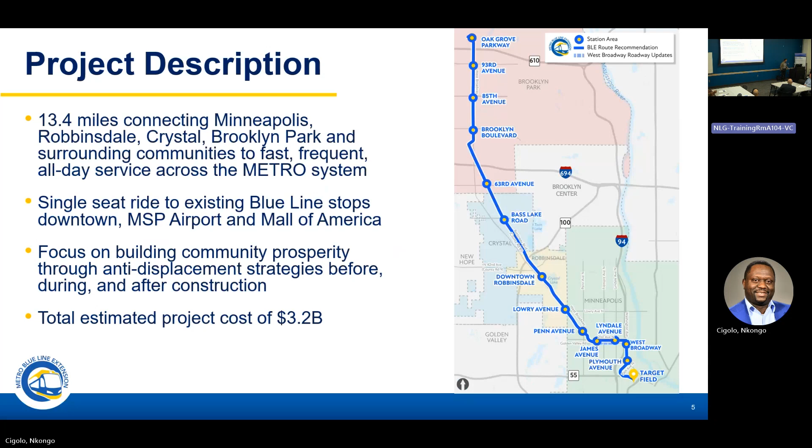And of course, with the extent of construction, in addition to bringing transit to communities, there's a huge focus on building community through community prosperity, through anti-displacement measures that make sure we maximize the value that this project provides to our customers and to the community.

In terms of project schedule, 2024 has been a very busy year. There's been a lot going on with both development of the preliminary design plans, as well as environmental work, and also a key milestone that we had to reach, which was municipal consent approval. So what I'd like to focus on is where we're at between these two points: summer '24 and final design. That's going to be our focus in '24-'25.

Environmental work is going to continue. We have to finalize our supplemental environmental impact statement. This is a federally funded project to some extent between Hennepin County and the FTA, and how this project is funded, it is important that we follow the federal guidelines and procedures, including the National Environmental Policy Act and the Environmental Impact Statement. As that's ongoing, we have already developed a 30% set of plans.

We have that to look at in person here as well. That's the set that went to the corridor cities for review and approval, and you'll see that shortly here as well.

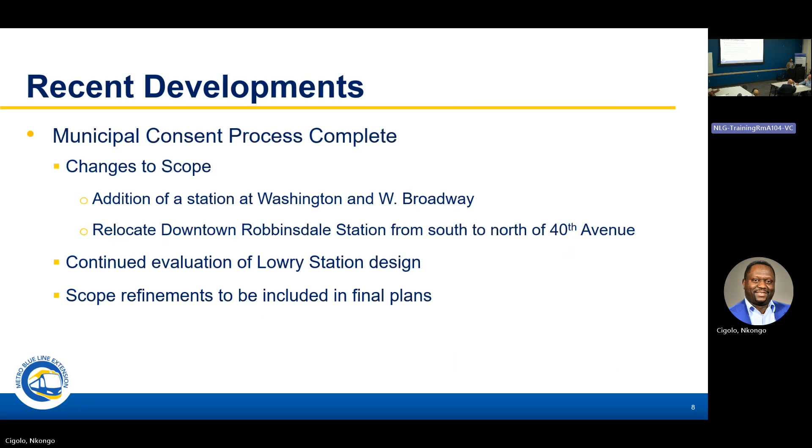There will also be a relocation of the Robbinsdale station at 40th Avenue from south to north of that intersection. That's not what's shown in our 30% design plans, where it's on the south side. There's also continued evaluation of the Lowry station and other scope refinements that we'll hear about shortly. With that, I'll hand it over to Nick.

Thanks, Shaheen, and thanks everybody for coming. I'm Nick Landwehr, Director of Engineering and Design for the Blue Line Project. I've been with the project since we opened the office in 2015. Prior to that, I was on the Green Line as an engineering manager for the Central Corridor project. I work for Metro Transit.

Can you hear me okay back here? I can hear the sound up here. Let's make sure we've got everything working back there.

So we're going to go through the alignment briefly. As Shaheen said, we'll have some roll plots out here, and if there are any questions about the alignment, I'm happy to answer whatever I can.

Just to recap, we're just shy of 13.5 miles of alignment. We started right over here at Target Field Station. This is an extension of the existing Blue Line, and we'll come off of Target Field Station, run through the North Loop area, cut across on a new bridge at 21st and through Minneapolis, and catch up with West Broadway.

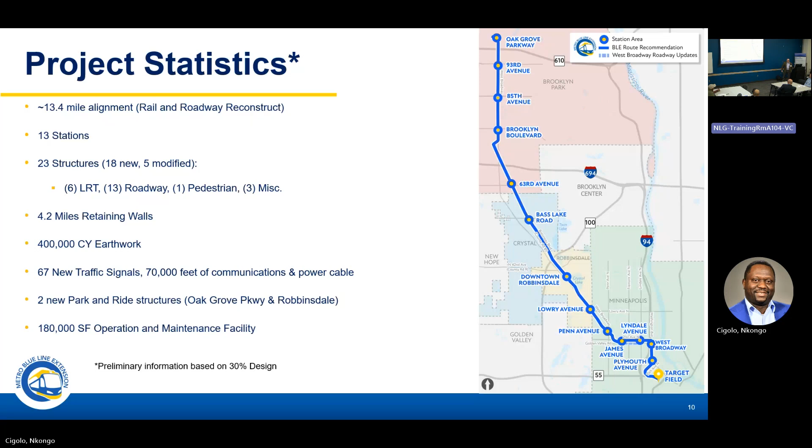Follow West Broadway up to about North Memorial Hospital at Lowry Avenue, where West Broadway changes into County Road 81. We'll continue on County Road 81 through Robbinsdale and Crystal, and when we get north of 694, the alignment shifts over onto West Broadway in Brooklyn Park, where we continue center running up to the northern terminus at Oak Grove Parkway, just north of 610.

We're at the north side now, working on some key elements. On the very north end of this project, north of 610, we'll have an operations and maintenance facility with facilities for roughly 32 vehicles. We'll have light maintenance in there, paint booths, wash bays, wheel truing machines, similar to our Franklin facility, and this will accommodate that line and its vehicles.

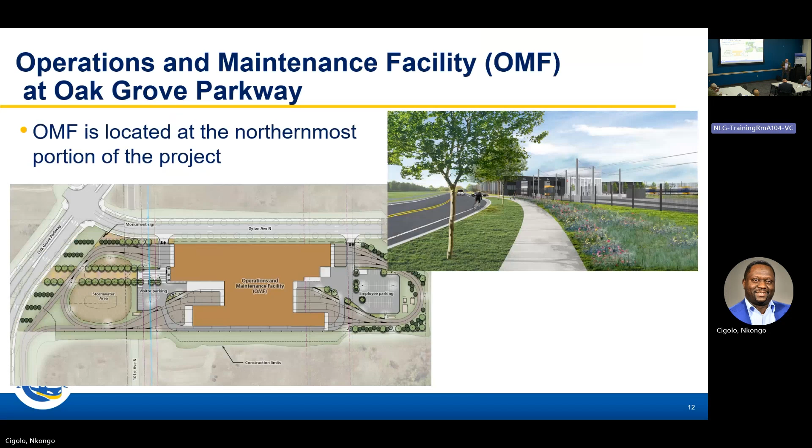Working our way down from the very north end, our first station is at Oak Grove Parkway. North of 610, for this project, it's pretty much a green field up there. Target Corporation has their northern campus, but otherwise it's pretty quiet in that area.

With this project, we'll be setting up the roadway network to accommodate our station and the maintenance facility. We'll work with the city to put backbone utilities in place and get that roadway framework established. We'll have a station here at Oak Grove Parkway, along with a park and ride for roughly 500 vehicles.

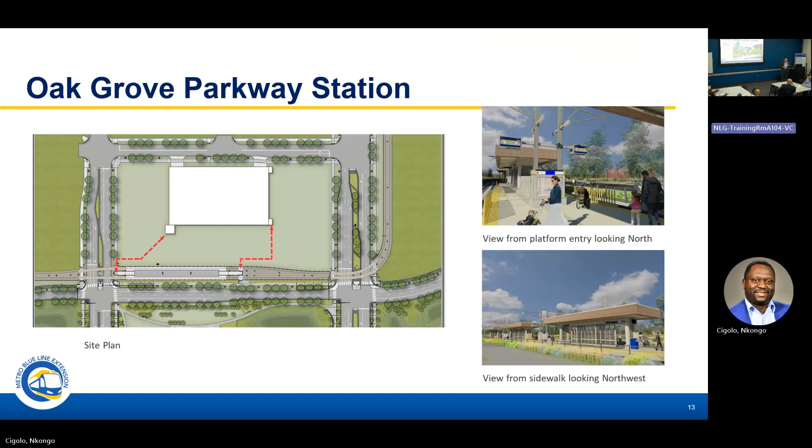Within this block, the city of Brooklyn Park is looking at development. I should note that most of our alignment will be at grade. We try to be center running within the roadway, and the stations, for the most part, would be center platform stations. We try to keep those consistent.

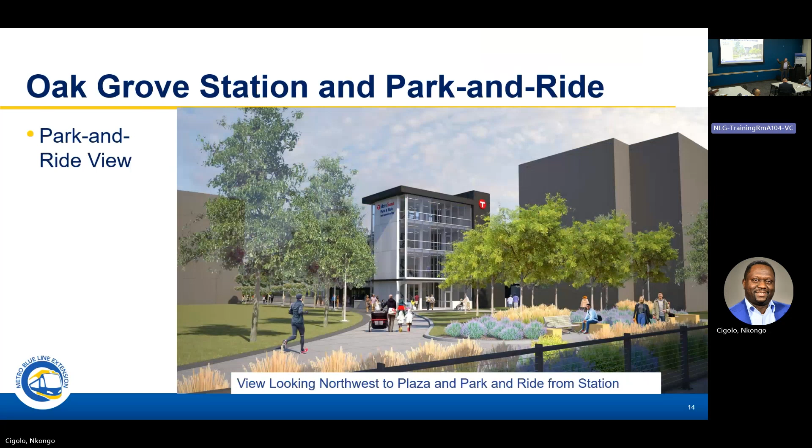So this would be the Oak Grove area, from the station looking at the park and ride, and the black indicates some potential future development.

Moving our way through Brooklyn Park, we have five stations there. This area at 85th is very typical of the stations in Brooklyn Park, at North Hennepin Community College. On the left-hand screen, you can see the station platform in the middle of the roadway with at-grade access for folks.

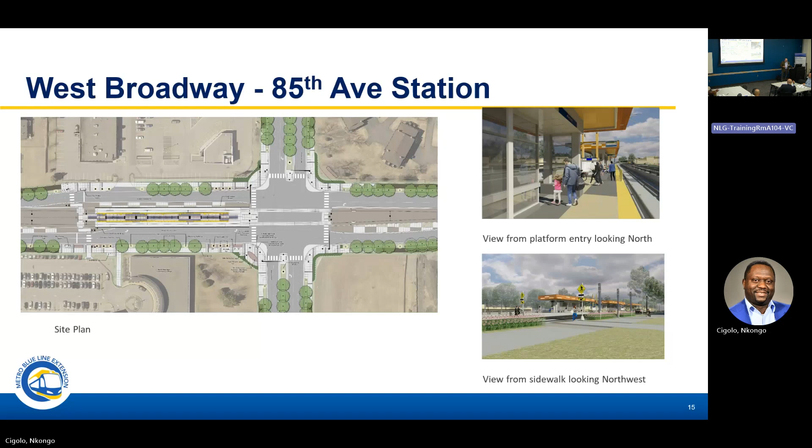All of the platform, the mechanical, the duct banks and such should be in about the same location for each station. We try to work with the community to differentiate them with maybe some of the color palette or how we handle roof facades. But we keep those very consistent for ease of customer use, ease of construction, and ease of our own maintenance.

As we come down West Broadway, about 90% of this alignment is in the county roadway, so Hennepin County is the local funding partner for the project. We're working closely with Hennepin County on the reconstruction of the roadways and the design as we work through it.

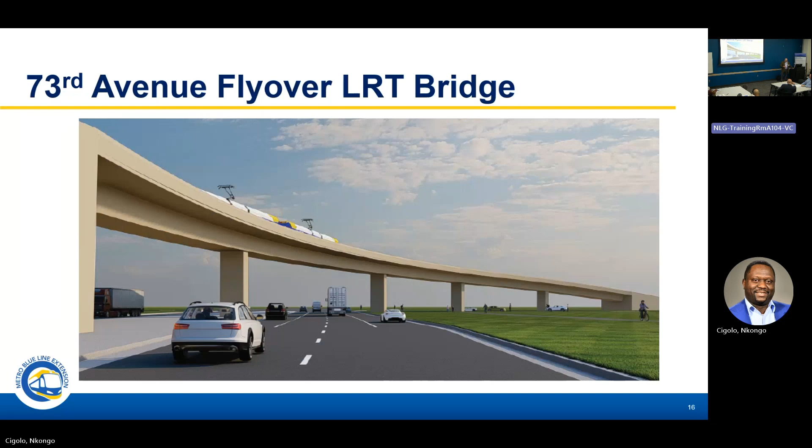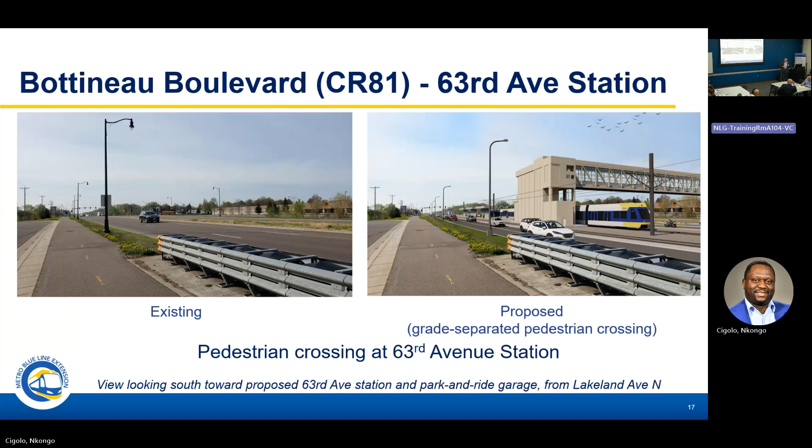Moving farther south, at the very south end of Brooklyn Park, is an example of the station at 63rd Avenue. We have an existing 550-stall park and ride that Metro Transit owns at this location. We'll have the station there, but it'll be in the center of 81, with a pedestrian connection from the park and ride over to the station. On the right-hand screen, the pedestrian bridge goes to a circulation tower that gets us to the platform.

Moving down into Crystal, here's a big piece of infrastructure. County Road 81 and Bass Lake Road, on the left-hand screen, is a fairly major county intersection. As we analyze the traffic and the light rail at this location, we're concerned with the amount of vehicles—there's probably about 10 lanes of traffic on 81 and everything going on there—so getting the station in there and keeping that intersection working well is key.

So what we propose, and what we have in our design, is an interchange. County Road 81 will go up over Bass Lake Road in this location, so we get that through lane of traffic out of the intersection and really clean up the operation there.

The bigger thing for us is we have a station showing just on the south side of Bass Lake Road going through the screen here. We keep the station down at grade, which gives us access to this location, especially at the south end where folks don't even have to cross traffic. It's really big for safety—bikes connecting both sides of the roadway with trails and getting folks safely to the station while cleaning up the traffic.

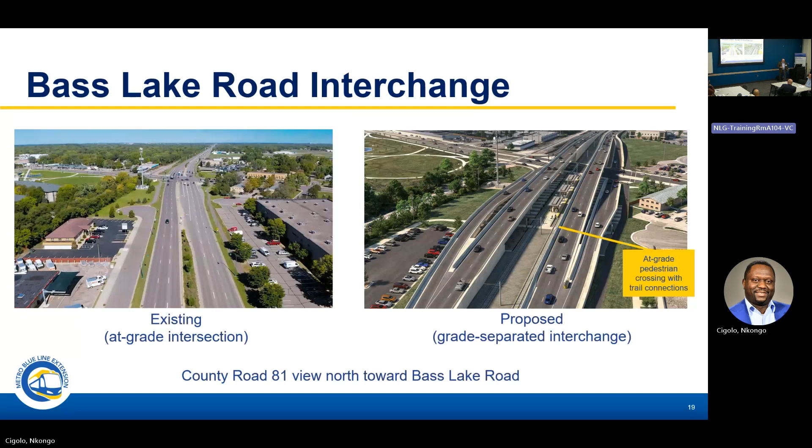So there's a good opportunity here—these are some ideas of what that would look like as a finished project, opening up the bridges underneath so they're light and inviting. You can see the trail, or sidewalk, on the right-hand side goes right underneath 81, a direct connection to either side, where the only thing folks would have to cross are the tracks.

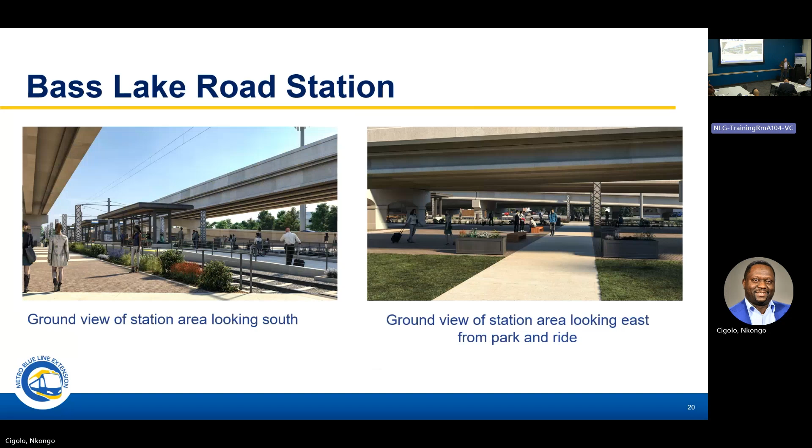Continuing down into Robbinsdale, as Ian said, this is one thing that came out of municipal consent with Robbinsdale, where the station location moved to this area. 40th Avenue runs up and down, County Road 81 is the guideway through here, and we moved the station platform to the north side of 40th.

Just below that, we also have a park and ride proposed, as well as an existing bus transit station a couple blocks away over by Hubbard and 42nd. We're going to move that function over here and include it with the park and ride, giving us that transit function with about a 290-stall park and ride directly related to the station.

This gets good access to downtown Robbinsdale area, good access to the park and ride, and good access to transfers from us.

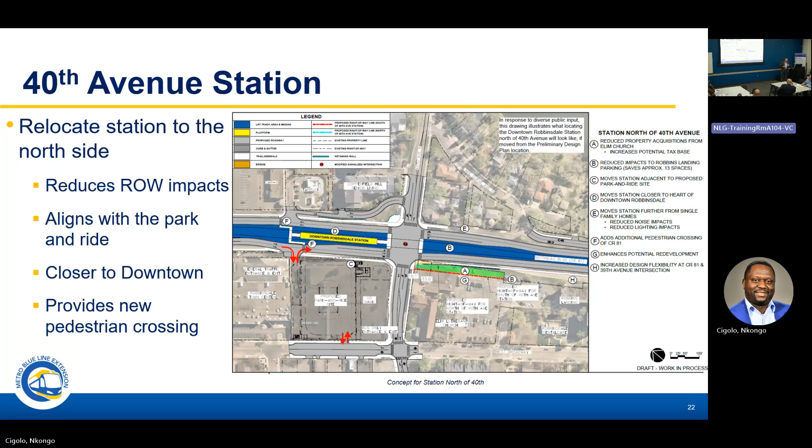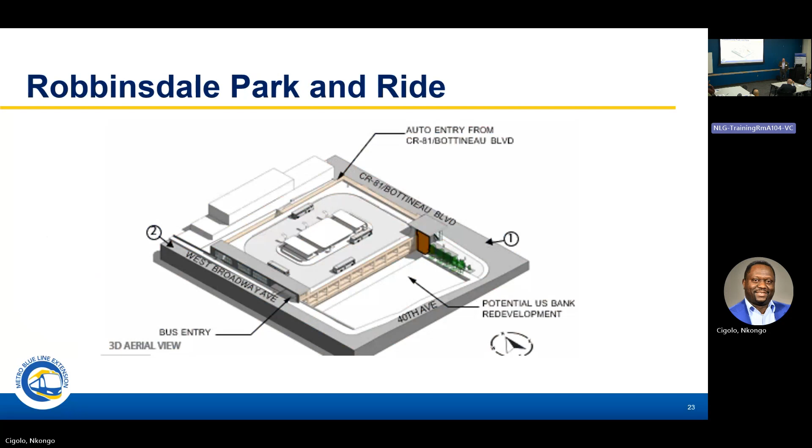This is a concept of what a transit station would look like here. We think that first level, Road 81 and West Broadway, is shown in the picture—there's about a 20-foot difference in that block. So we're able to get park and ride on the bottom of this area, with the bus at grade with Road 81. On the West Broadway side, we're able to come in right on grade with that transit center, with buses coming in off of West Broadway—very convenient, and it fits in with the location.

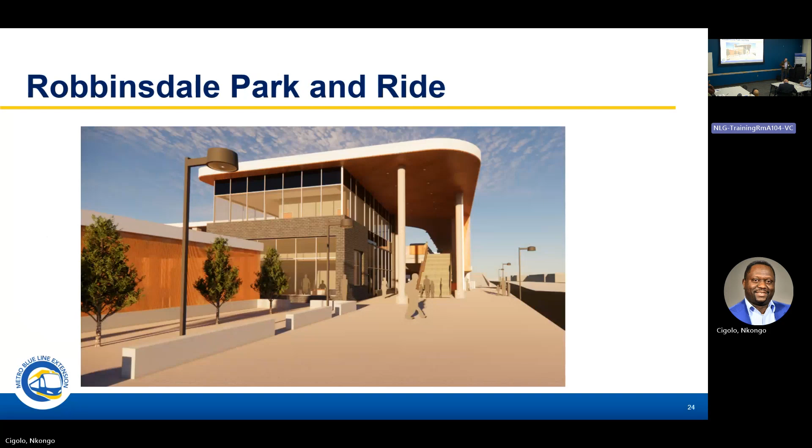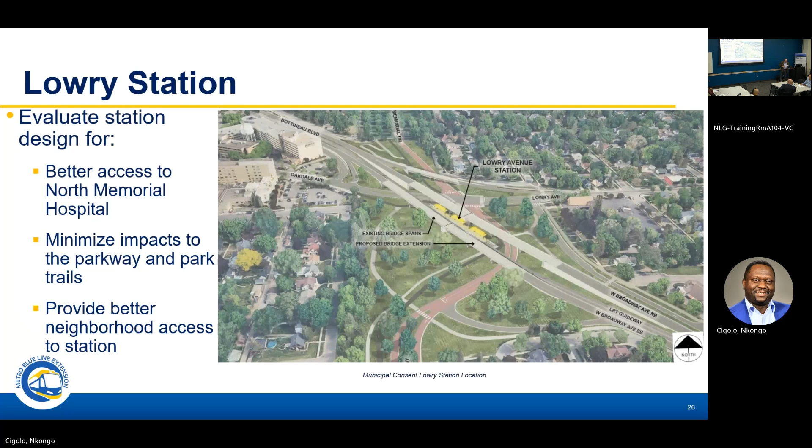So we would come down West Broadway. Right now, West Broadway is about two lanes of traffic each direction as it kind of winds through this area with a lot of curves. We'll be center running here, a lane of traffic on either side, and make sure that we have left turns at signalized intersections.

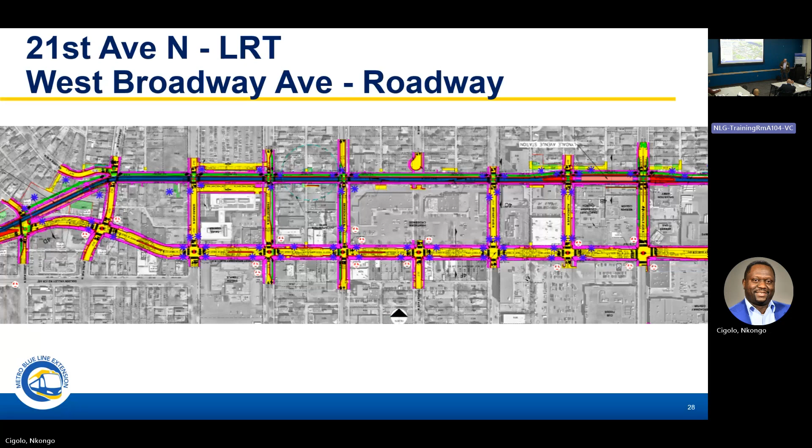So the other opportunity, it's just off the screen here as we're curving through here - a new bridge for light rail and for roadway that crosses the 21st extension that will go across 94 in this area. So a chance to get vehicle traffic across there as well as a bridge for light rail, and so a new bridge there.

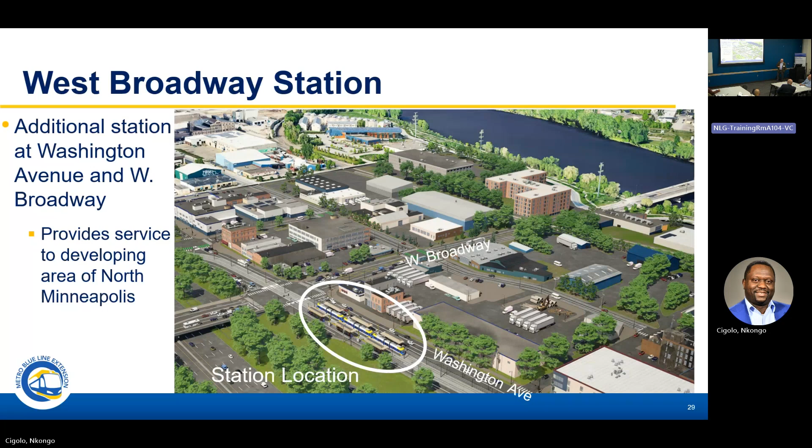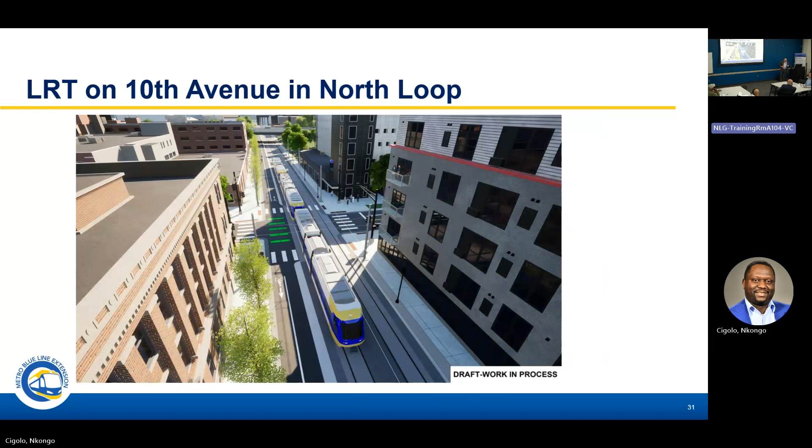Set up for the project. Here's a better shot of what 10th looks like between there. It's very narrow right of way here. You can see we're basically construction building face to building face, with sidewalks on either side and bike lanes going down the south side. This is looking west from Washington Avenue, towards the viaducts at the top.

We'll be available for more questions here, and available to go through and look at things.

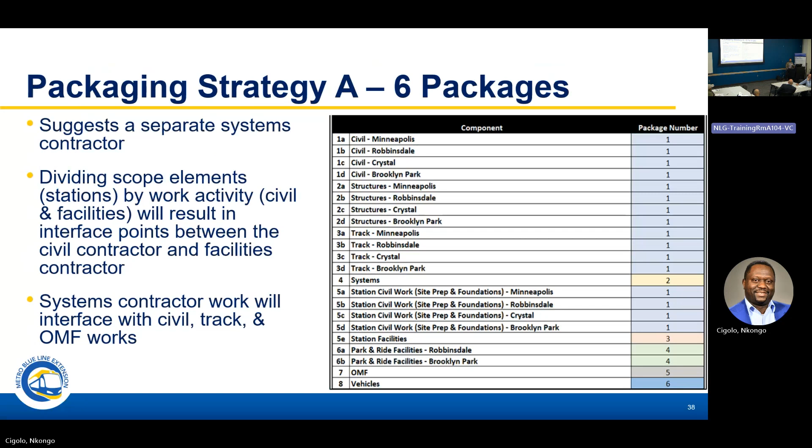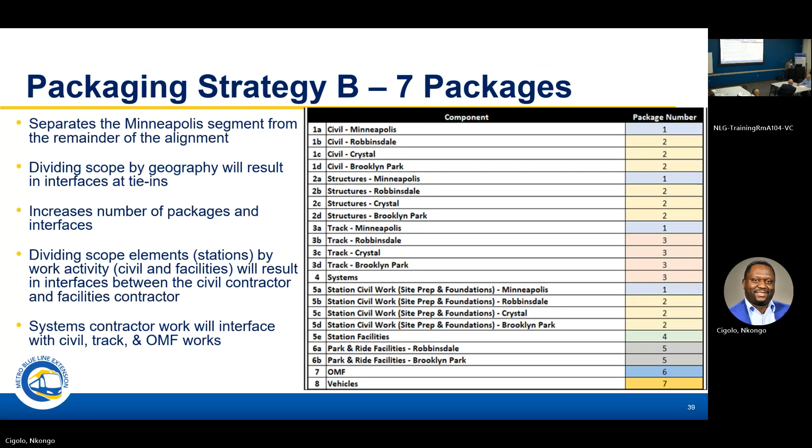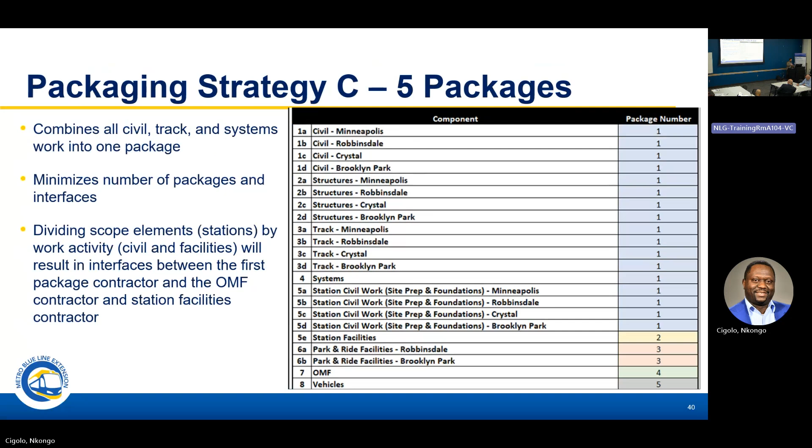Finally, as we look to find ways to minimize contract interfacing risks, this is one attempt at that by reducing the number of contracts to 5, having civil track systems for the entire corridor as one large contract, and then having your station facilities and park and ride OMF as the other contracts.

I talked about best value procurement. Many of you may already be familiar with this process, but to quickly give an overview: we're all familiar with low bid, the traditional approach where we design and then procure a separate contract for construction. This follows the same path, except there's greater focus on value, defined by qualifications, experience, strategic approach, and price. So price is not the single and only determinant here.

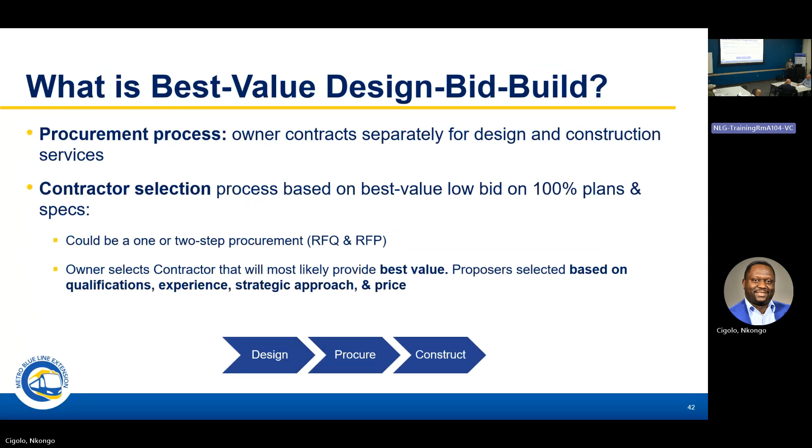This is what we're looking at quite seriously for the major civil construction. There are two possible ways of doing this: a 1-step or a 2-step procurement approach. The 1-step being that we go out and put an RFP out there, receive proposals, and evaluate them based on the criteria we have. The 2-step is we add requests for qualifications, shortlist our pool of participants, and then requests for proposals.

So if we were to take the 2-step, have that request for qualifications, here are some possible criteria. Again, this is still being developed and subject to feedback received through this process. But we want to put out some things that's more or less a resume — very data driven, so we want to know the contractor's work history, key personnel resumes, group qualifications, and maybe financial statements. This is a sample of what it may include.

With the best value option, something else it enables us to do is have a more interactive approach, where we're able to increase our engagement with the proposers on this project. We're able to have them help us add value to the final proposal package that we're going to put out there. That can help identify perhaps some value engineering solutions or other methods or risks that we should be aware of and working into our plans through the alternative technical concepts approach.